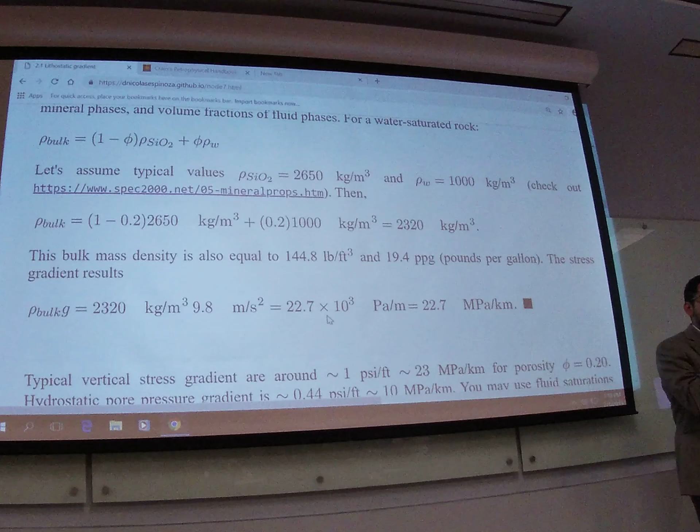How's that going, guys? Any questions? So remember, the only thing here to change is the value of porosity and the value of the density.

Raise your hand. Bulk density, yes. So you see how the bulk density has... units of gravity again, meters per second squared. That would help.

Oh, does she want just the gradient, in terms of Z? Yeah, he wants a gradient. Yes, the density times gravity. Yeah, so he doesn't care. He wants it in specific units.

What do you get for the pounds per gallon, PSI? For the... I hate this unit. I get 2.6.

I did this, 2.8, yeah, and then the 1 minus the porosity. What did you get here? 2.52 kilograms per centimeter cubed. 2.808 kilograms per centimeter cubed.

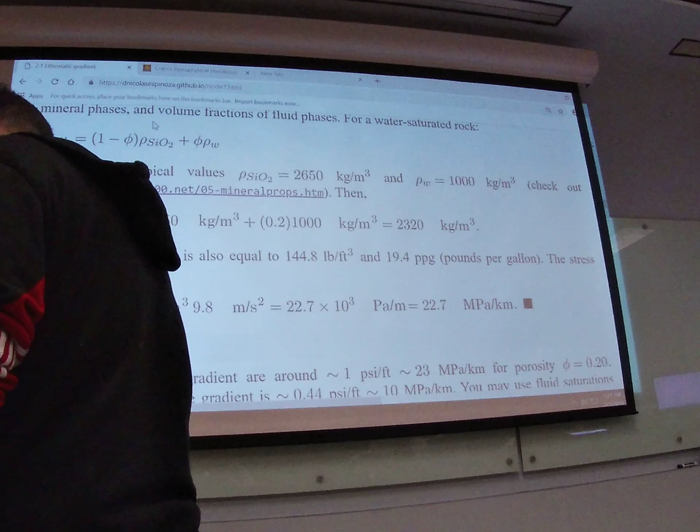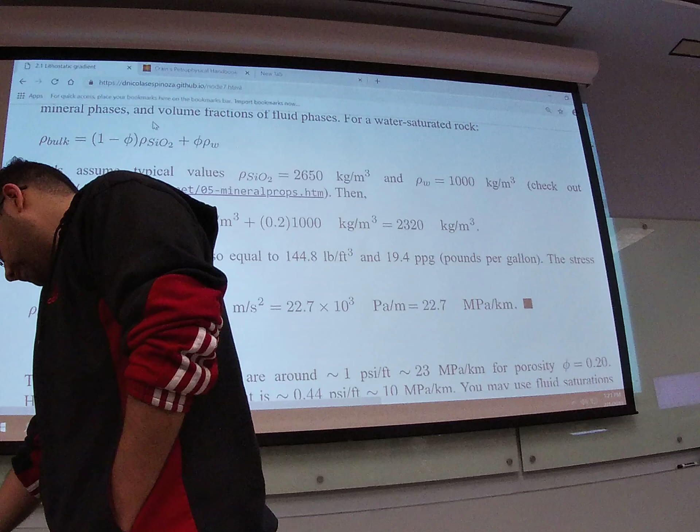This unit conversion, what unit conversion do you do? A lot. Are you done? Are you trying to convert this to that? All right, guys, no. Let me tell you more or less the answer, okay?

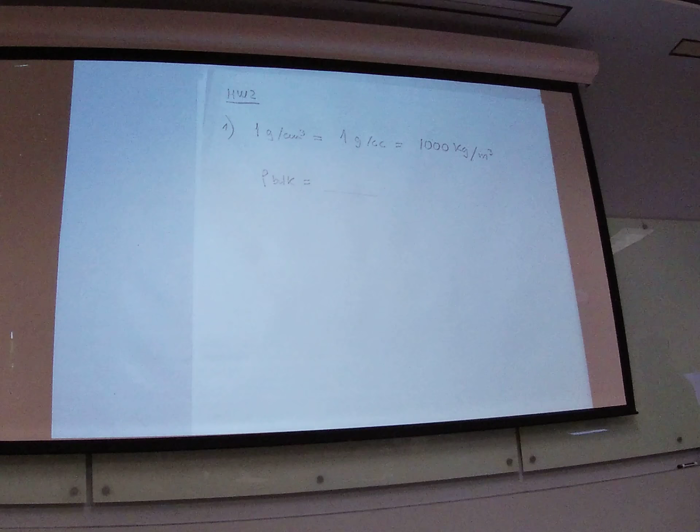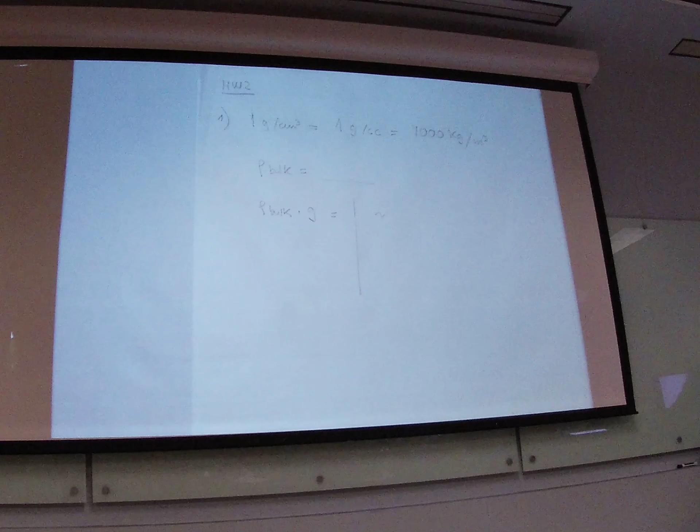I think you know how to solve this problem, and you're very close to solving it. So basically, here you have to compute the density with that equation we saw before. Then the gradient is just going to be the bulk density times G, and that's going to be more or less 26 MPa per kilometer.

Check your results. It's going to be more or less 1.1, let's say 1.15 psi per foot. And is it going to be more or less, how many pounds per gallon? 22 pounds per gallon.

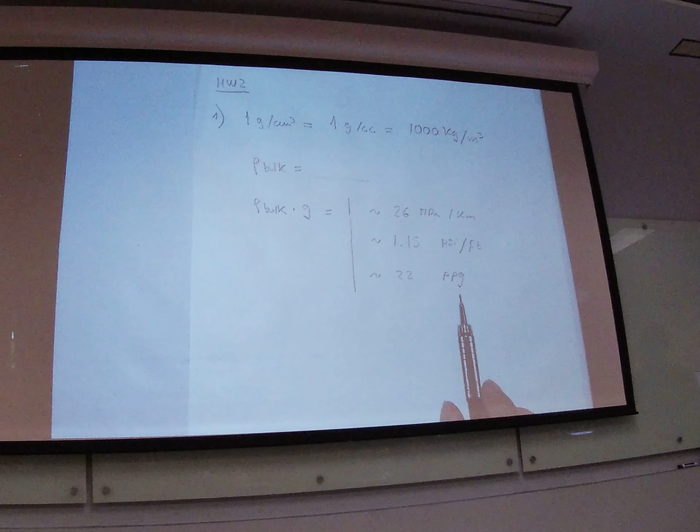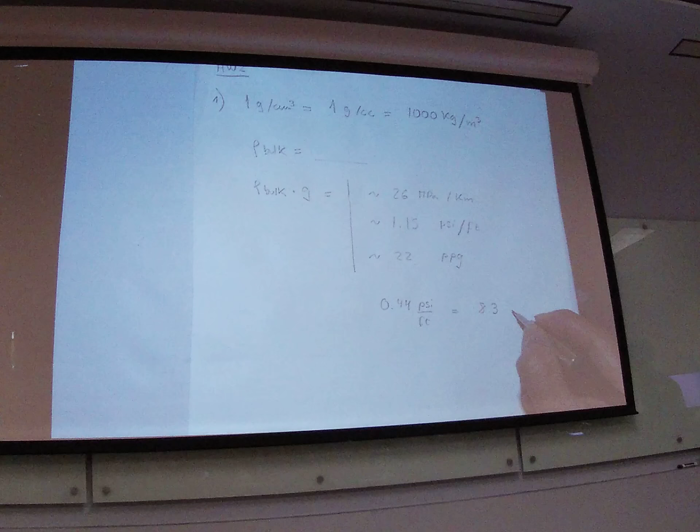We didn't talk much about pounds per gallon before, but remember that a gradient of 0.44 psi per foot, which is given by the density of water, is equal to a gradient of 8.3 pounds per gallon, ppg.

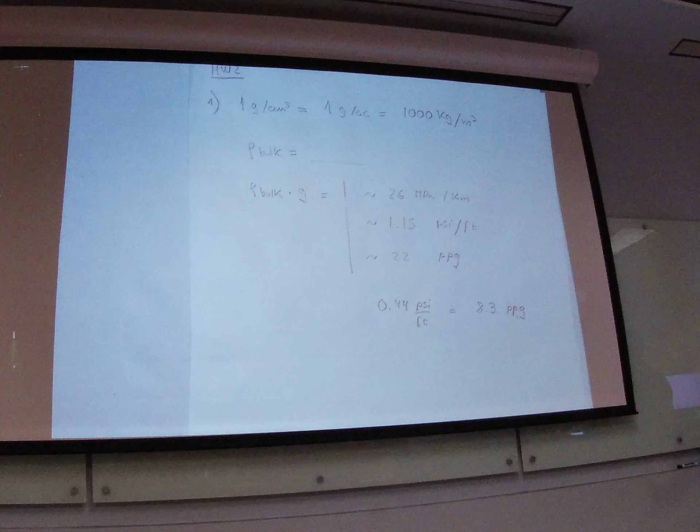Okay, so continue working on the problem. I strongly recommend that you check the solved exercise if you get stuck at some point.

Let's go to problem number 2, okay? Problem number 2.

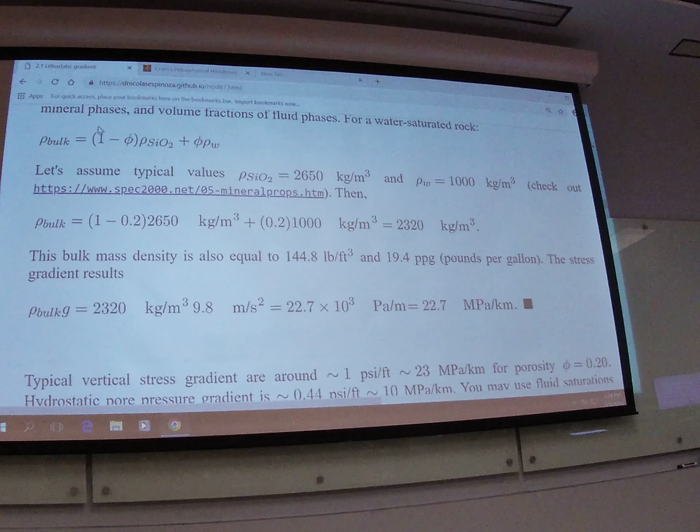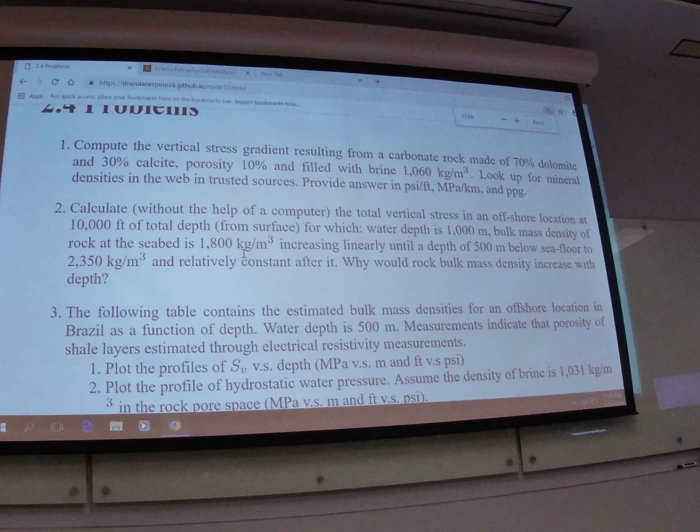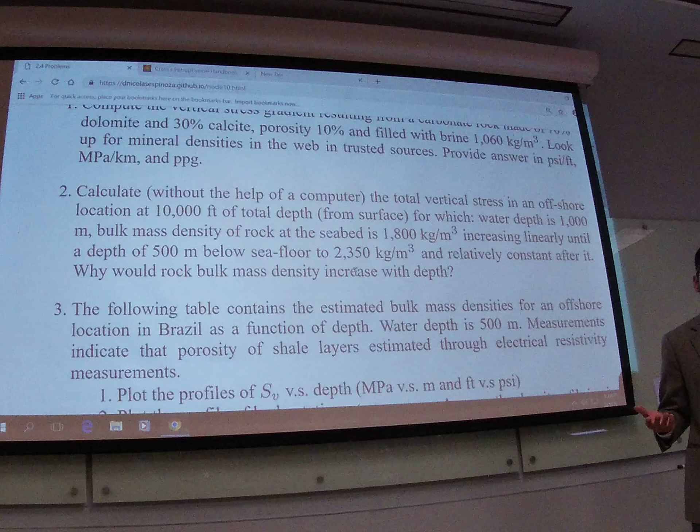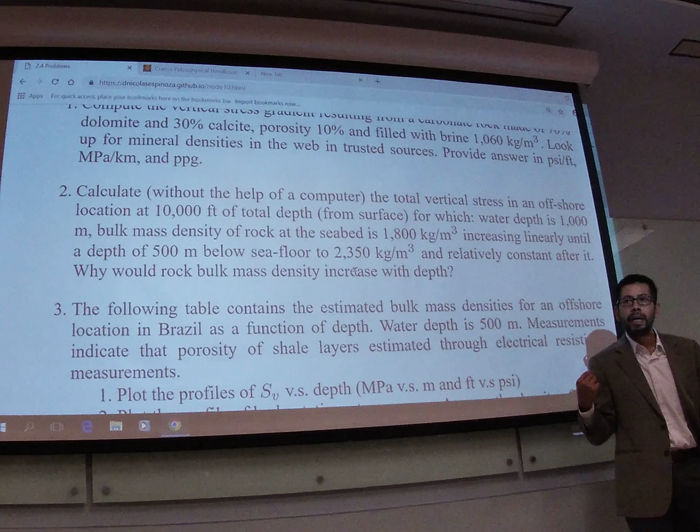Okay, problem number 2 is just a reminder of how to solve an integral with the trapezoidal rule. That's it, okay? That's what you should remember in order to do the other problems with numerical integration. The numerical integration is just an extension of the trapezoidal rule.

So here in problem number 2, you have a place offshore. And apparently, let me draw this first, and then I'm going to switch. It's offshore. You want to know conditions at 10,000 feet of depth, total depth.

Remember, I'm always going to refer to depth from the sea level, and you have 1,000 meters to get to the sea floor, and then 10,000 feet to get to this point. And here's where it becomes a little bit different. You know that the density of the water is... where's the density of the water?

Okay, it doesn't say, so we're going to assume it. Whenever it doesn't say, just make a fair assumption. I expect that also you know some typical numbers like lithostatic gradient, hydrostatic pressure gradient on top of your head. So what is the density of water? What would be more or less a good assumption?

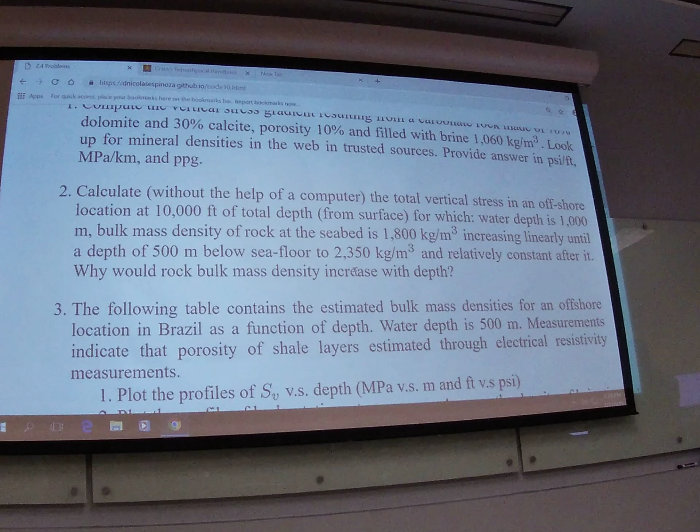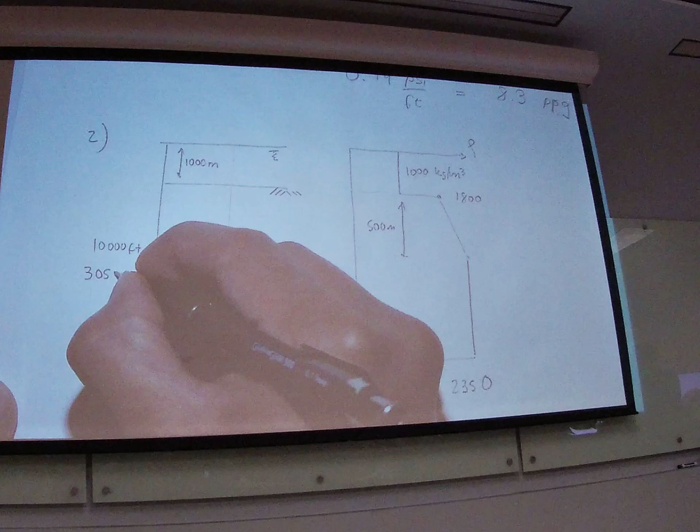This is what we have in the problem. We have a depth of 1,000 meters to the seafloor. Then we have 10,000 feet to the point that we want to compute stress. 10,000 feet is going to be equal to 3,048 meters. And then the problem says that from the seafloor to 500 meters below the seafloor, the bulk density is not constant but increases linearly from 1800 to 2350. This variation accounts for the fact that rocks and sediments compress as they go deeper.

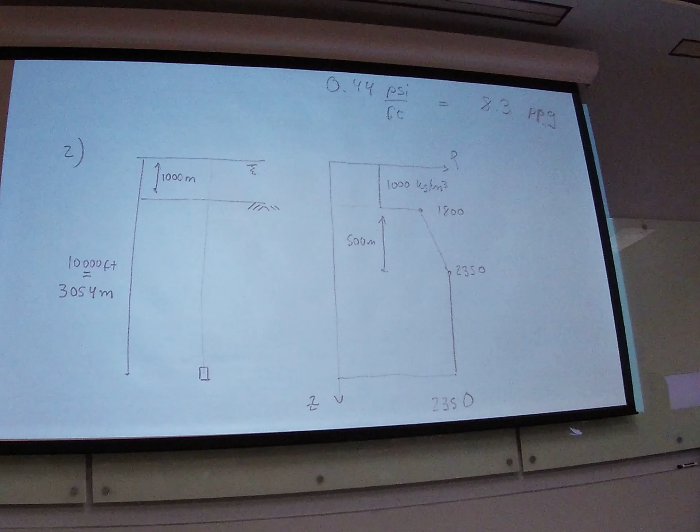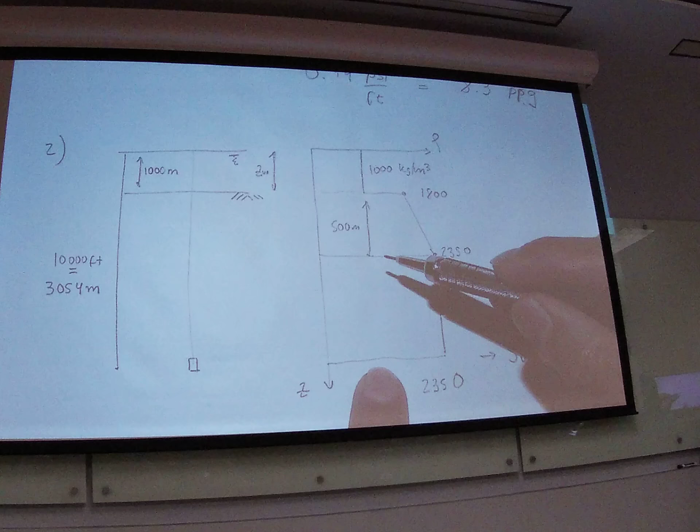So the question now is, what is the value of SV at this location? When we use the equation with a constant density, we just did density times this length, right? And if you notice, that is just the area under this line.

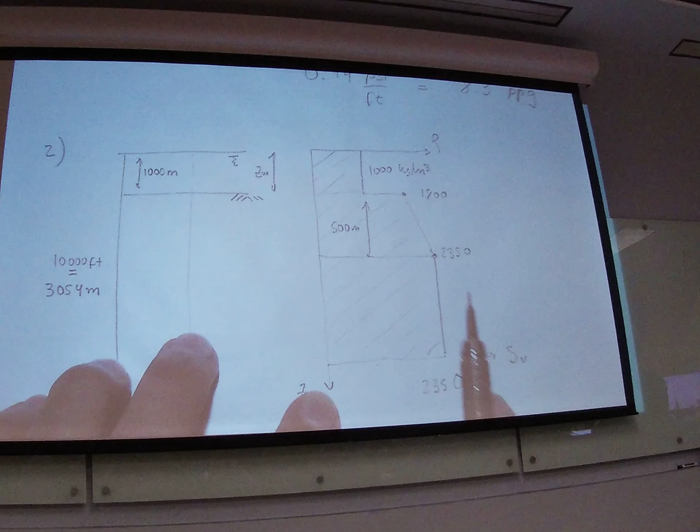It's an integral. That is what the equation told us, that the general solution is just an integral. So if you want to compute the stress, in this case, you just have to compute the area of this line from here to the axis. So how would you go about that? You multiply this length times this constant density, plus - how would you compute the area of this trapezoid?

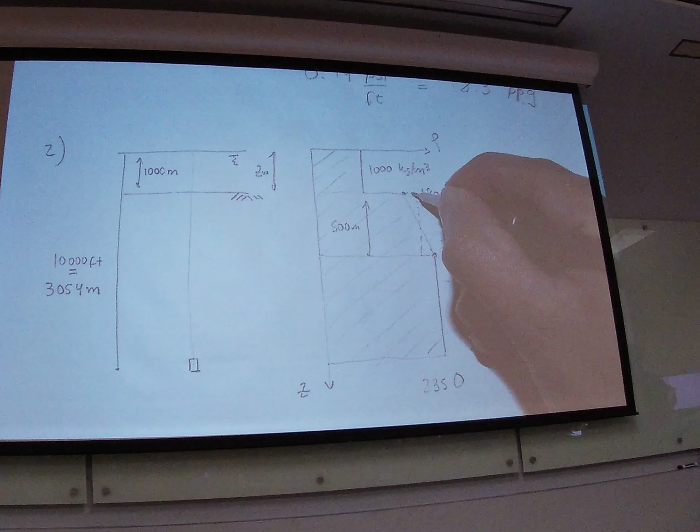Break it into a rectangle and triangle. You could do that, but the easiest way would be to just take the average of these two and multiply times this length. So the average of these two numbers gives you a rectangle that has an area equal to the area of the trapezoid. Plus this density times this other length, and that's it. That's the value of the vertical stress.

Okay? So compute a number and let's see what you get.

Here Muhammad tells me that my memory is failing, that this is not 54 but it's 48, and I think he's right. So 3,048 - I was off by 6 meters. This is the exact same thing that you're going to do in Excel in the next exercise. So if you get the answer, please let me know, and I'll give you some extra points.

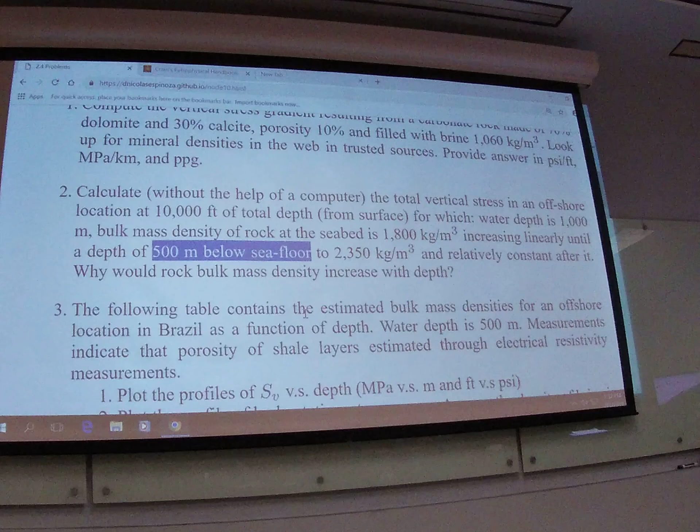The depth between 1800 and 2350 is 500 meters, right? Isn't it 550? Between what, the 1800 row and 2300 or 2350? Yeah, it's 500 - that's what it says in the problem, right? I think I read that correctly. Yeah, it says increasing linearly 500 meters below the seafloor.

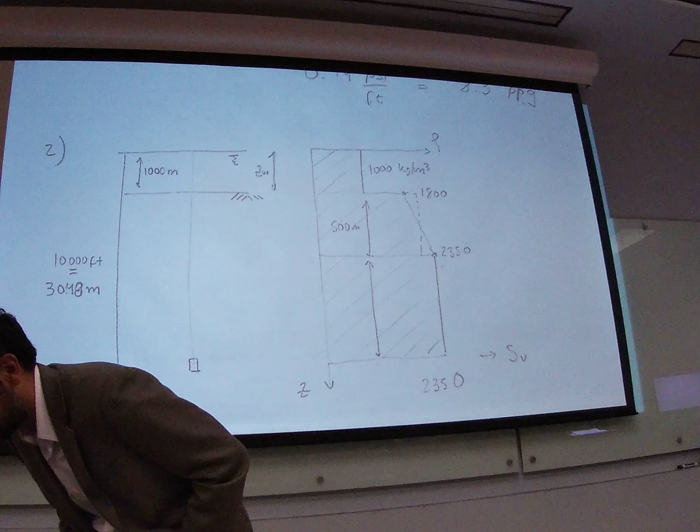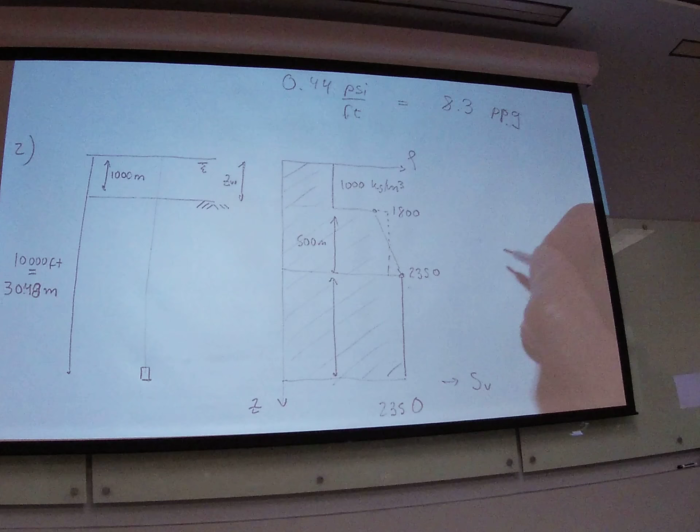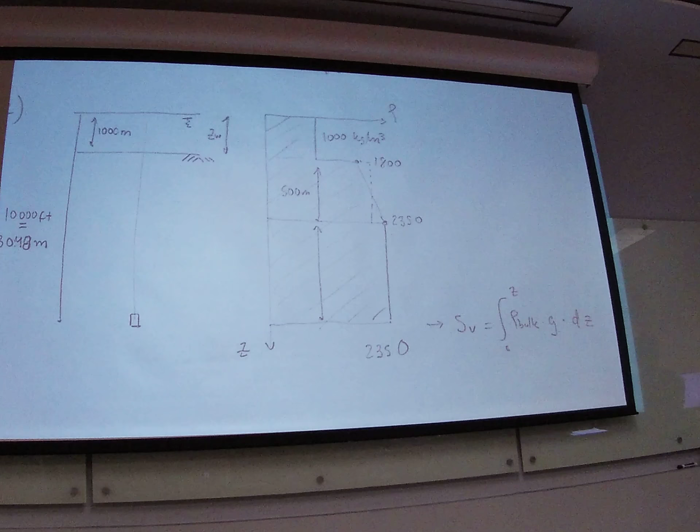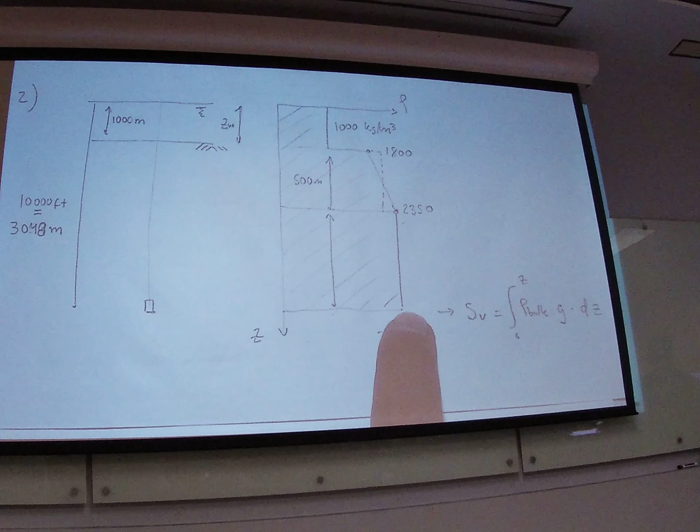Anyone has the answer? We are measuring SV, the entire thing, right? Yes, I want to get SV at this point. Yes, you have the answer? I think so, what is the answer? Really big. No, but give me a value in MPa, okay? Because you could give it in Pascal, but try always to convert those stresses either to MPa or to PSI.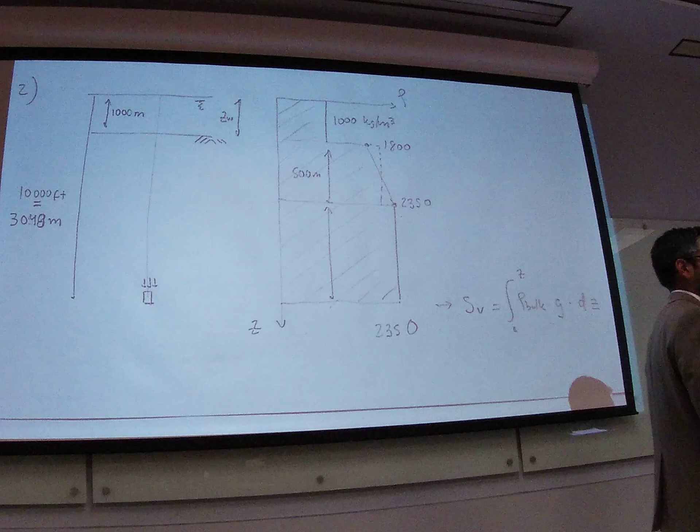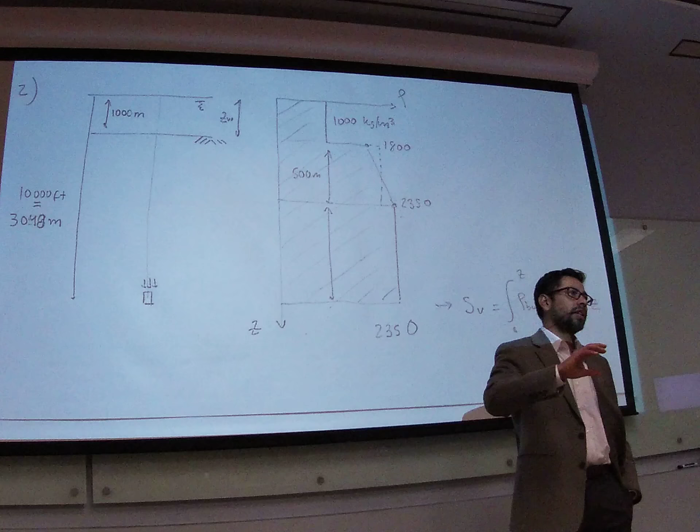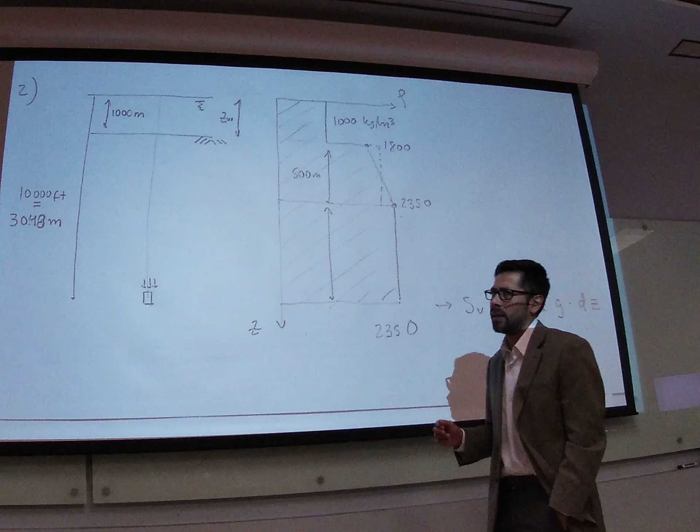I don't think it's right, but it's 5.56 times 10 to the 4th. No, I don't think so. The determinant... 1,470 - what, oh sorry, 10,470. 10,000 MPa? I don't think so. As a general rule, guys, remember all these stresses and pressures are going to be in the range of less than 20,000 psi and less than 100 MPa. If you get more than that, it's very likely wrong. Remember the G, okay, and remember the units.

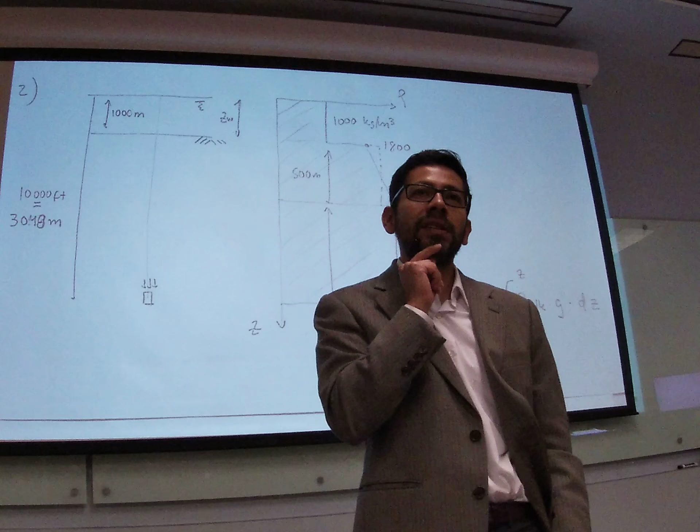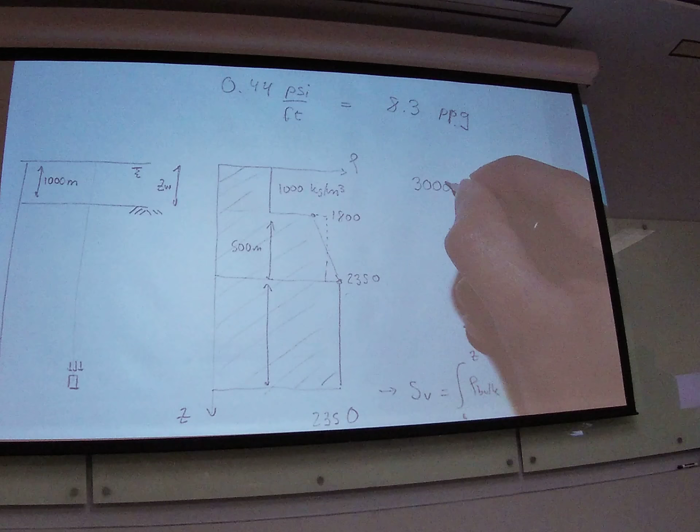You have the answer? I have 8,068 psi. That sounds reasonable. What about in MPa? I have 55.6. Okay, another very useful conversion, guys: 3,000 psi is equal to 20.6 MPa - that's a number I remember a lot because I used to conduct...